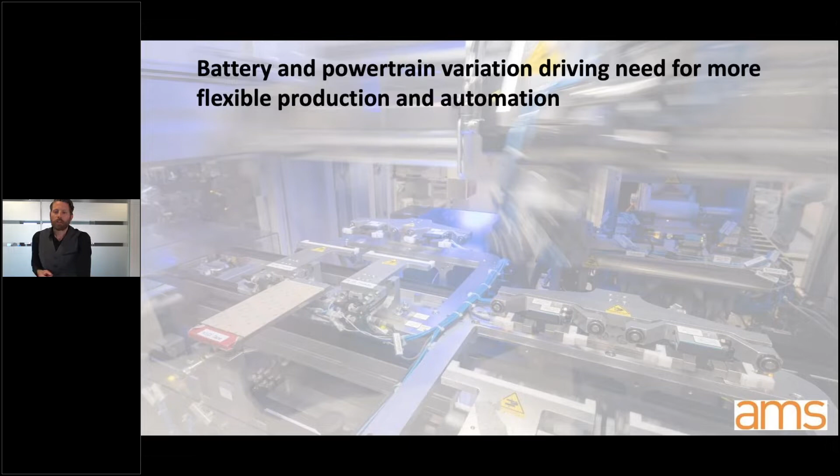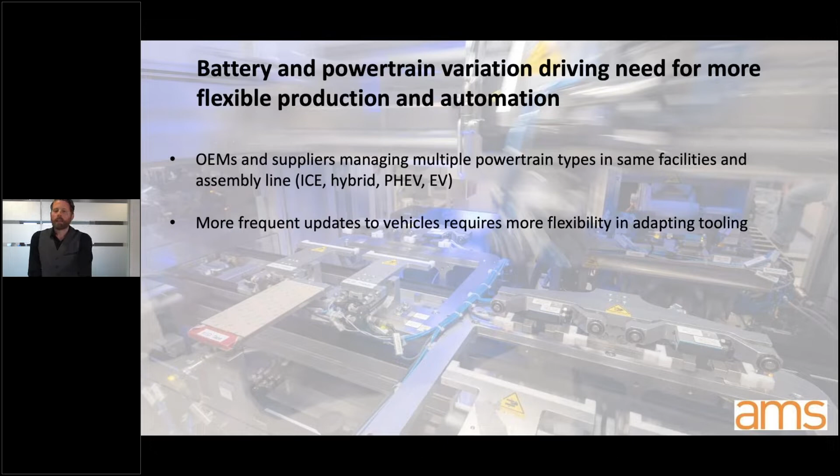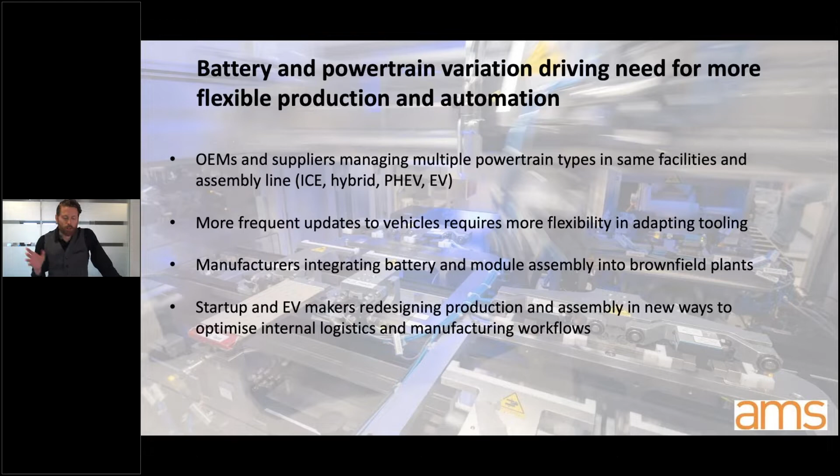So just a little bit more about the why. As mentioned, the variation, driving need for flexible production and automation, multiple powertrain types and vehicle types in the same facility, often on the same line, more frequent updates requiring more flexibility, as well as integrating new technologies and batteries and module assembly into brownfields. Not that we won't talk about greenfield as well, but it's really key to be able to do this in existing facilities. We see the opportunities that startups and greenfields are taking to optimize space, which we're going to touch upon as well. And clearly the rise of battery cell production gigafactories is also requiring a lot more flexibility in producing fast changing technology.

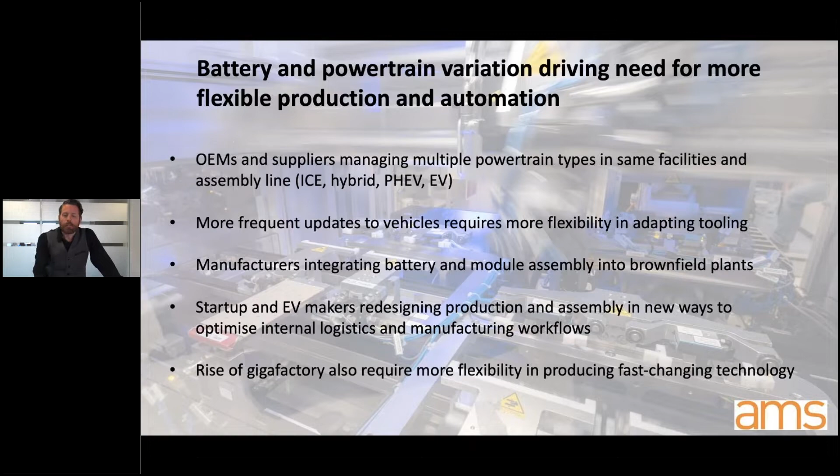There's a lot of opportunity in the marketplace in terms of the technology allowing for this. AMRs and AGVs with autonomous logistics flows, providing opportunity for cellular-based robotics, where production planning and workflows can be optimized by availability and priority, more flexible tools that can supplement or enhance existing robots and tooling that allow for more change, and certainly greater use of connectivity, software, and data analytics across production to develop more predictive and responsive production. Last but not least, different kinds of automation, assisted automation, cobots, and the role they can play in production, both now and in future, perhaps in areas that typically have had less automation in the past, such as final inspection.

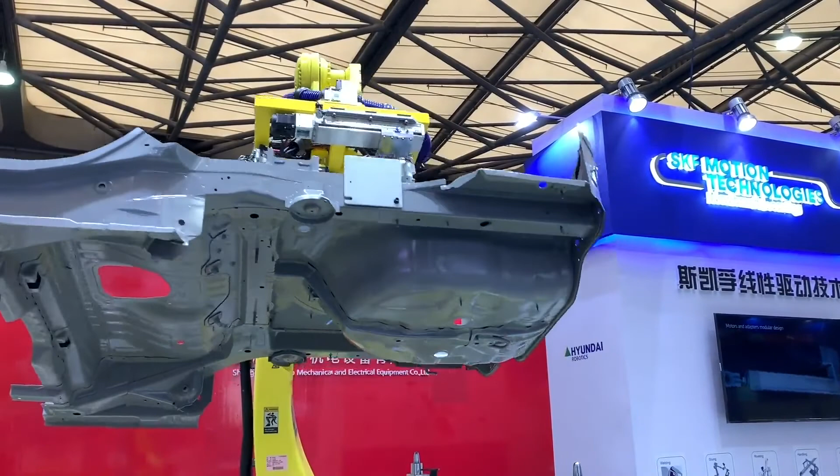Okay, so there was a bit of an action there. Before we go to Christian for some examples, maybe Laurent, tell us a little bit about what we just saw. That was the car transfer unit, I believe, with some end effector there too. Maybe you want to explain a little bit more about what we saw. Sagwan, can you explain what you've seen?

Yeah, so that video is just for showing a flexible end effector. We use linear modules with servo drivers there, so we can change the clamping unit to a different position for clamping other parts. This is just one part, but we can change the clamping point and take the part at a different position. We only show 3 linear modules there, but we can very flexibly attach another one and also other axes, so it's more flexible than others. It means many different parts can be taken by just one gripper, a flexible gripper.

Yeah, I would say this is really an example. This case is a 3-axis case that we've done in Asia, but we've been to 5-axis, 6-axis, and we can go up to 7-axis depending on the size of the parts that need to be managed. You can really see here, if you had an end effector with a fixed position, you'd have to change it all the time as you have different parts. So the saving here is, in a few seconds you adapt to the new part, which would have taken human intervention before with a traditional end effector with manual positioning. You have to stop a robot, somebody goes in, changes the position manually, then closes the robot and you restart it.

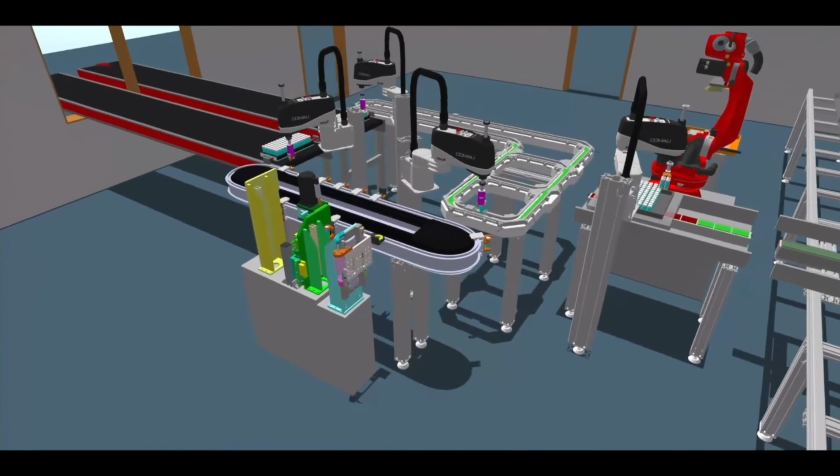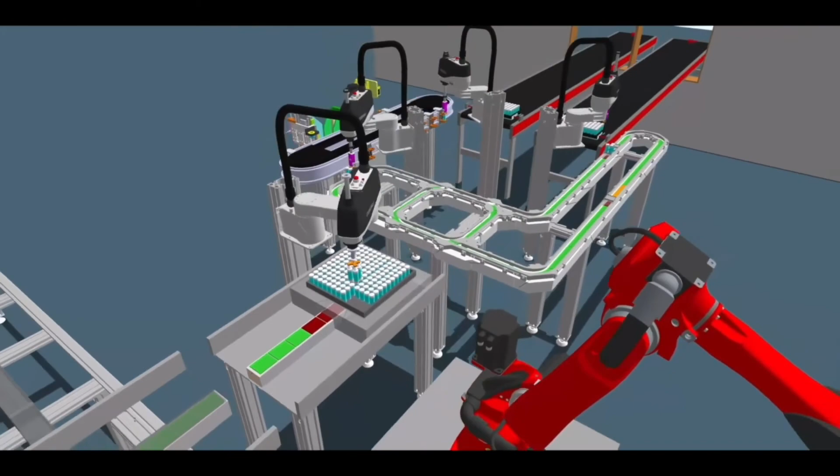Slow them down and regroup them, and you can carry very light things like just a simple cell, one entire pack that goes up to one ton, one entire vehicle if you want. So it's a highly standardized system. Think about Lego bricks that you put together, so you can easily extend the system as needed, or just change it if you feel that you need more stations, or if you do something else. So that's basically one of the main advantages.

And of course, in terms of throughput, I believe this is also a system where nothing comes close with a traditional conveyor, since you can go with much higher speeds and still handle your products with high care, because you can de-accelerate and accelerate very softly. So this is just one of the main advantages of such a system that could be implemented everywhere.

Great, another great example there, illustrating well what we were talking about. I want to come back to a point Laurent made earlier on co-creation, co-design, and then of course, Christian, you were talking about the tools available with digital simulation and twins, which perhaps can enhance and speed this up. From the panel's point of view, clearly that's something that could benefit this push to flexible production. Is there more of it starting to happen? Are you working more and in different ways with your customers, with OEMs and manufacturers to do just that? Or is there still room to integrate this planning earlier? I'll start first with Laurent on that.